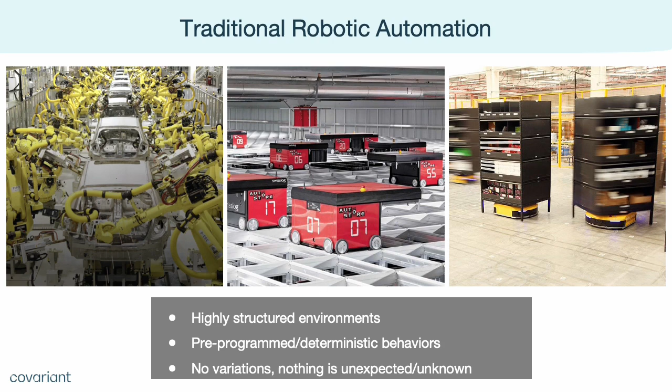While this has provided incredible value for a ton of industries, from car manufacturing to chip design, there is an enormous market segment that cannot be served by traditional methods. If you look at some of the real logistics problems, the same pre-programming approach cannot work. The environments are less structured, there's a higher amount of variation, so the robot has to be able to perceive the environment, plan its actions, and react to online and changing situations.

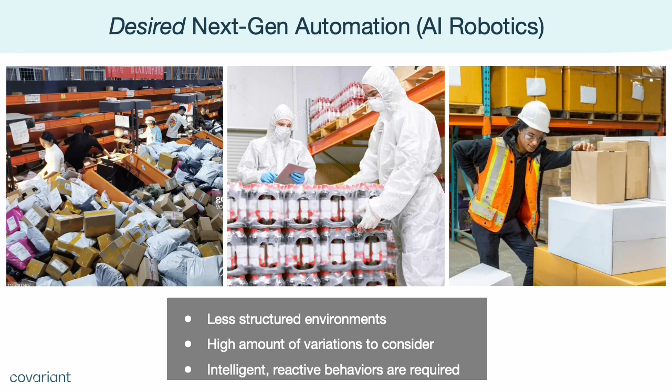Coincidentally, these are also the types of tasks that we would like to automate because of labor shortage, worker injuries, and other issues. And that's what we do at Covariant.

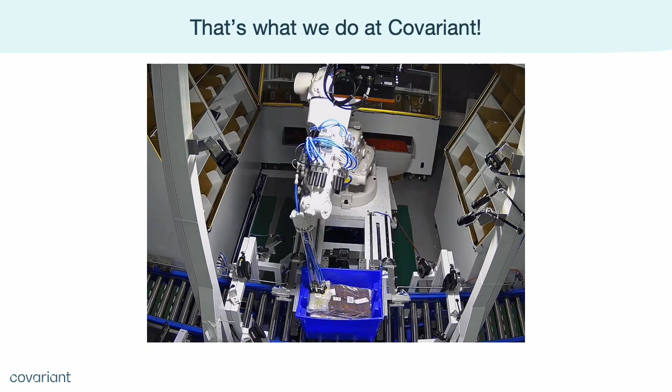Here's an example application called Putwall, where our robot picks up random apparel items from random locations and places them into designated positions so that they can be shipped to customers. Not only does the robot have to perceive and reason about the environment, it also has to adjust its online behavior so that it can transfer the object safely, stably, and also fast.

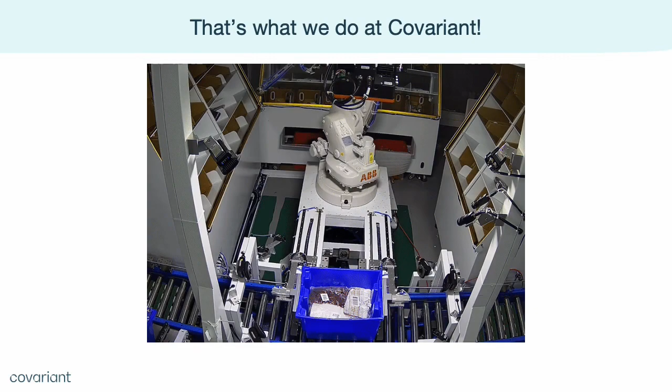Here's another application where our robot not only has to pick up random objects, but it also has to arrange them in such a way to maximally utilize the space available in the target container.

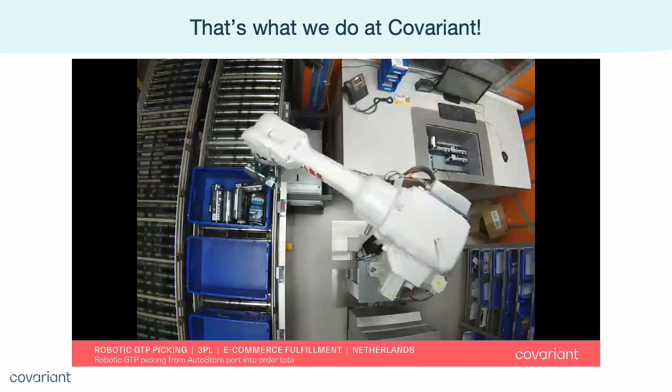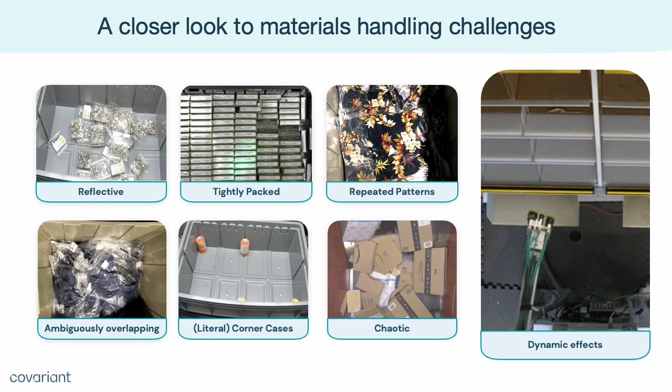There are also literal corner cases, meaning that it's hard to grasp an object without running into collisions. Some scenes are so chaotic that you don't know which one to grasp in the first place.

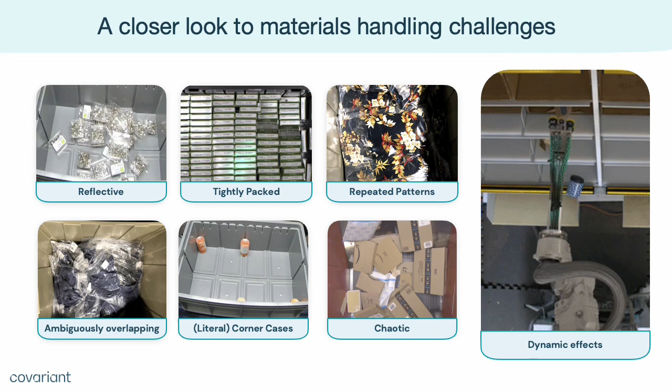There are also dynamic effects. In this case, the box being transported actually has another object inside, and it falls out because our robot is moving too fast. Another difference from the academic world is that in order to deploy the robot, it has to achieve human-level autonomy so that the economics can be justified.

While publishing a paper, it might be fine to achieve over 90% accuracy, but that means 10% of the time it will fail, which could mean a human operator has to stand by to catch the failures and fix it. Versus if the robot can achieve over 99% autonomy, that could mean that one operator can manage a whole fleet of robots that will deliver actual value to our customers.

So how does Covariant handle all these challenges? Over these last 4 years, we have found 3 main pillars to focus on in order to achieve autonomy in a scalable way. As we will see throughout this presentation, scalability is a critical concept. If each AI robotics application required a large amount of targeted R&D work, the business case evaporates. The 3 pillars are composability, self or semi-supervised learning, and simulation.

Let's dive in. The first pillar is composability. Let's compare composability with the main vein of recent AI and machine learning literature, which has a focus on end-to-end model-free learning. In other words, the system designer should just play an ultra-minimalist role. There are just system inputs and outputs with one monolith machine learning model in between.

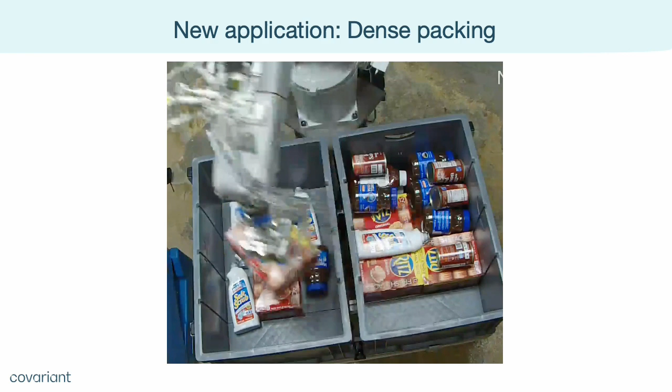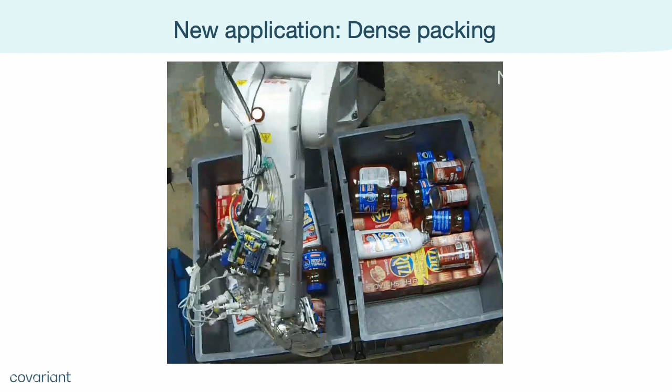The same 3D understanding model can be used for another different application. Here's an example where our customer wants us to place objects very densely into the target container. We simply pick up the objects, use the same point cloud and depth sensing model, then train another model on top to predict the best placement locations to achieve maximal density. If you look at the diagram, it's simply adding a head on top of the 3D object geometry model, and that becomes a packing application.

So I've covered how Covariant uses a composition of skills to achieve better performance and generalization. Let's next look at pillar 2, which is self or semi-supervised learning. I've covered how Covariant obtains different robotic skills such as 3D recognition and object understanding by training supervised models, but those have been very typical computer vision tasks. How does Covariant actually assemble those skills into concrete pick-and-place applications by generating grasp points and trajectories?

That comes to the key part of our technology. Let's begin with grasp point generation. You might be thinking that this is as simple as, say, object classification, where a human annotator tells where the robot should grasp.

But if you do the math, you'll realize something. If you have one robot station doing 1000 picks per hour, each pick requires 6 camera captures because we need 6 cameras to recognize the depth. If the robot runs 16 hours per day, 300 days per year, that equals 28 million images per year. If we have hundreds of stations, then we have billions of images per year — it will be impractical to get human labels on all of them.

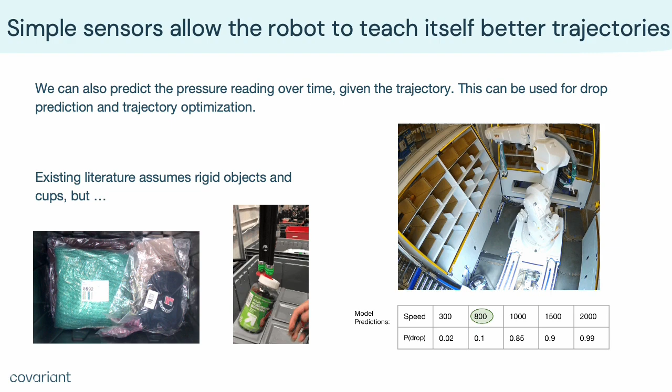In this case, the model predicts that at speed 1000, there's a high chance of dropping the item, but at 800, there's a much lower chance. So the solution is to take speed 800, achieving both a high speed of transport and a small chance of dropping the object.

I just described how to train a suction loss model with just perception inputs. However, the weight of an object, which has a large role in determining suction loss, cannot be predicted from images directly. So what do we do?

We install additional sensors called load cells and IMU, which can detect forces, angular velocities, and accelerations on the objects. Then we use such sensor inputs together with perception inputs to train a model that predicts the weight of the object.

In some cases, we're able to acquire the ground truth weight of the object through the warehouse management system our customers provide. So we can automatically acquire a large amount of training labels through this process, and then apply the learned model to cases where we don't have the ground truth. The model's predictions of object weight will be updated online dynamically, and the feedback controller will use the updated weight to automatically adjust the speed to prevent dropping the object.

To summarize, in order to grasp and transport the object successfully, we need a suction seal model to inform the grasp sampling policy, a suction loss model, and a weight estimation model to inform the trajectory optimization process. Luckily, the ground truth labels of such models can be acquired from off-the-shelf sensors automatically at scale, and that's a very key part of covariant technology.

So I just covered the other two pillars, composability and self or semi-supervised learning of covariant tech. Let's take a look at simulation.

However, sometimes it is necessary to learn from the simulation instead of from the real world. Learning through experience might not be an option all the time, because mistakes can be expensive or dangerous. For example, if the robot runs into a collision, it takes tremendous effort to repair it and to reset it to the original state.

Sometimes, for robotic skills that we want to learn, the real-world data is either very expensive or noisy, and I will show you one example later.